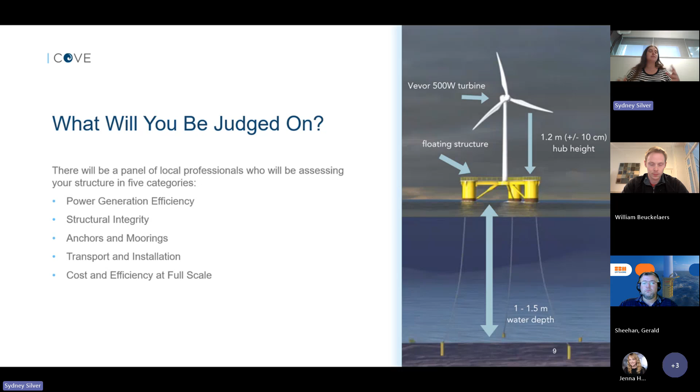You'll also be judged on transportation and installation. So how efficient are you and how long does it take for you to get your turbine from land into the water? And then finally, you will also be judged for your cost and efficiency at full scale. So how well do you use the budget that you're given, budget it out, what materials do you use compared to expenses, etc.

Here's our timeline for the local challenge. So right now, registration is open and ongoing, and that is going to close at midnight on November 30th. Next, we'll be submitting your budgets. We will basically do this as you sign up. We will reach out to you, get you to create a budget for how much money we were giving out to each team. After we've approved your budget, we will send you your money for your structure.

Then you will work together to actually build your structure, and this will be ongoing throughout the rest of the timeline. I will also be doing monthly check-ins with each team. So it'll be very quick, 15-minute check-ins once a month, just to make sure everything is going well and to check in if you need any extra advice, help, or mentors throughout the challenge.

The next and really big step for both us and the global challenge is submitting your abstracts. We want those submitted both to us and to William on January 23rd. The next is test days. There's going to be 2 different test days that we're going to have at Rely on New Tech. These are going to be on weekends in January. So these are going to be opportunities for you to take what you have on your structures already and test them in the water a month or 2 before the actual challenge takes place. And then finally, the local competition is going to happen on the weekend of February 21st to 23rd.

Perfect. And this is a very brief overview of what your abstracts are going to look like. They have to be a 1-page A4 flyer. We want them to have a sketch or a 3D drawing of your floating structure at competition scale, not full scale. We also want them to have the details of participants. So that's your photos, names, your university or college, your year of study and program. We also want you to explain some of your standout features for your concept.

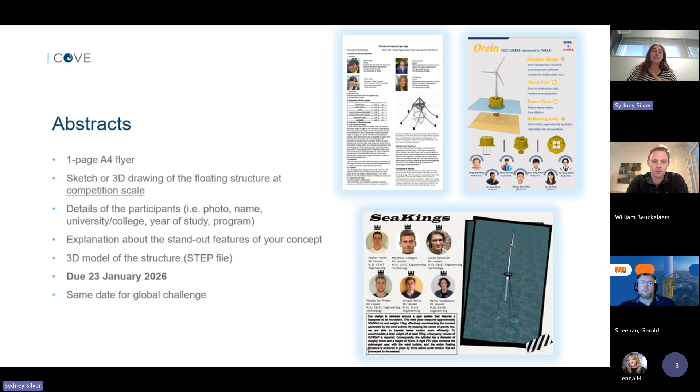We also want you to additionally send us a 3D model of your structure in a separate file, usually a STEP file. These are due on January 23rd, and this is the same date for the global challenge as well. Perfect. So I am now going to welcome William to do his talk about the global challenge and get more details about it. Thank you so much, William.

Oh, I can't hear you. Perfect. Thanks for inviting me. I tried sharing my screen. I'm not sure if it's live. Okay, great. It is.

So first of all, maybe I'll just quickly introduce myself. I'm the founder of Offshore Wind for Kids and also the Floating Wind Challenge. I've got a background in civil engineering. I've worked in the offshore wind industry for over a decade, but now I'm trying to inspire the next generation. With the Floating Wind Challenge, we really try to stimulate innovation in floating wind. And so you'll have to design and build your own floating wind support structure.

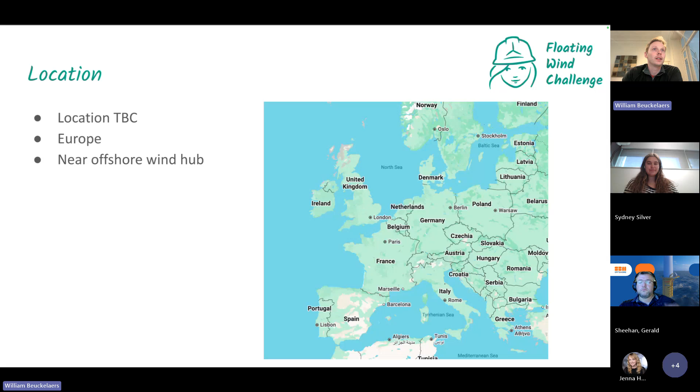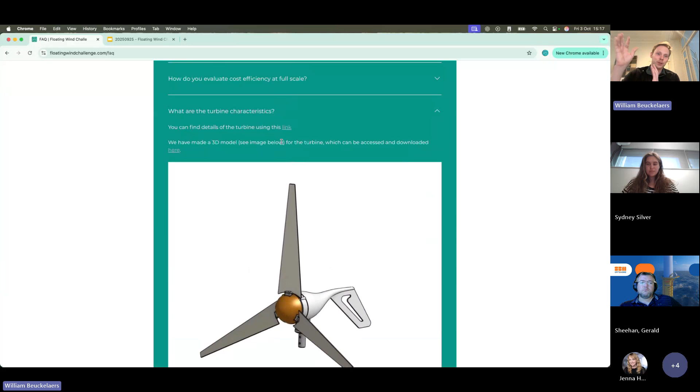So the abstract, I think Sydney already covered. Important this year compared to last year is that you'll have to provide a 3D model of your structure. And we've actually recently put the 3D model on our website, so I'll just show it really quickly. It's available in our FAQ, frequently asked questions, and if you go to the turbine characteristics, you'll see a 3D model that you can just use, and then you don't have to worry too much about that part, and you can focus more on the support structure.

So if you go to this website, you'll find the working document. We may tweak it a little bit, but at least you have something to build upon and then build your whole structure below it.

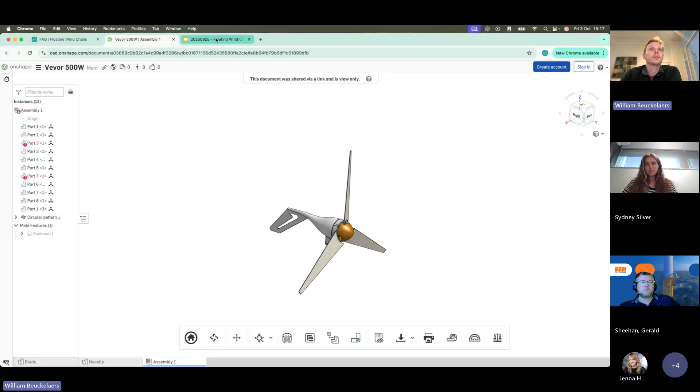Then around May, you'll have to submit the report and a video of your structure and some additional documents: risk assessment, installation and decommissioning plan, and an overview of your structure costs. We will provide a little bit more detail around this later on in the competition, because this year we want to make sure that everyone does a risk assessment following the same procedures, and also follows the same template for the installation and decommissioning plan. But this information will follow later in the competition.

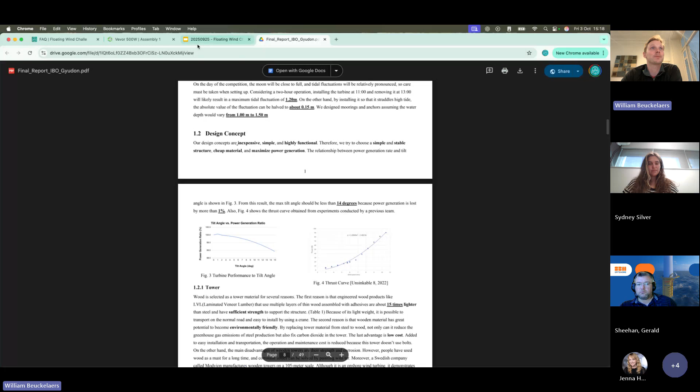And if you want to have some inspiration, we've made the top 3 reports available. If you click on one of these links, you will be taken to the reports from last year. And they can serve as really interesting inspiration to see, okay, what does a top performing report look like? What do I need to do to win the prizes? It's also available in the FAQ. Just checking where it is exactly. Here, some examples of the reports from the previous years, dating all the way back to 2023. So yeah, if you want to have some inspiration from previous teams, you can look through this.

So the criteria, first of all, structure specifications. It's a 500-watt wind turbine. The hub height is 1.2 meters above water level with some tolerance. And then water depth is minimum 1 meter and maximum 1.5 meters. The important thing here is that you have to do manual installation, so you cannot go much beyond this.

And you're being evaluated along 5 criteria, which each get 20 points: power generation, structural integrity, anchors and mooring, transport and installation, and materials and fabrication costs. But important here is that this year we will assign some bonus points within each of those criteria for innovation and sustainability. So if you have some innovative ideas that contribute to improving the structural integrity or anchors and moorings, then you will get some bonus points, or similarly for sustainability. So we try to encourage you to also think a little bit on the innovative side and on the sustainable side. But that being said, if you do something like this, it has to have a positive impact on one of those criteria. I think that makes sense.

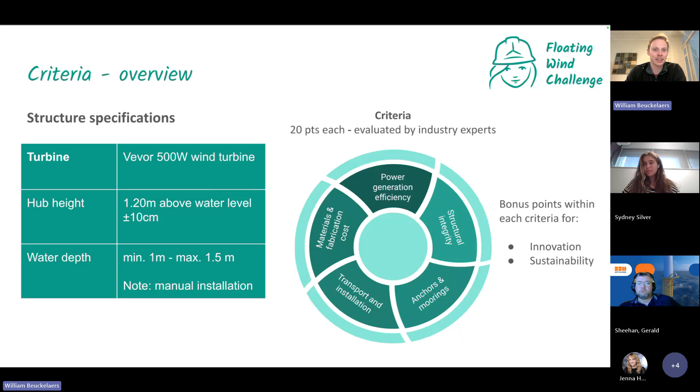So just focusing a little bit more on the reports. The first 3 items you have to evaluate at competition scale, prototype scale. But items 4 and 5, we ask you to also evaluate at full scale in the report, just because we have to make sure that the concepts translate to full scale offshore wind turbines. And there are some reference documents that you can use for the full scale models. For the structure, we have a detailed table of how we evaluate the points. For example, for transport and installation, if you have a fast installation sequence within tolerances, it'll get a score between 14 and 17. And like this, we add all of the points together and then decide the winner.

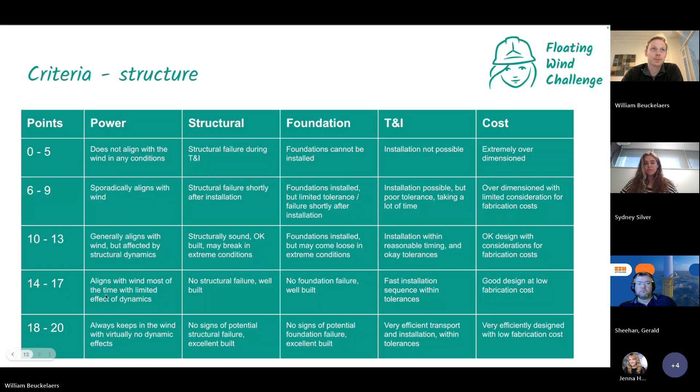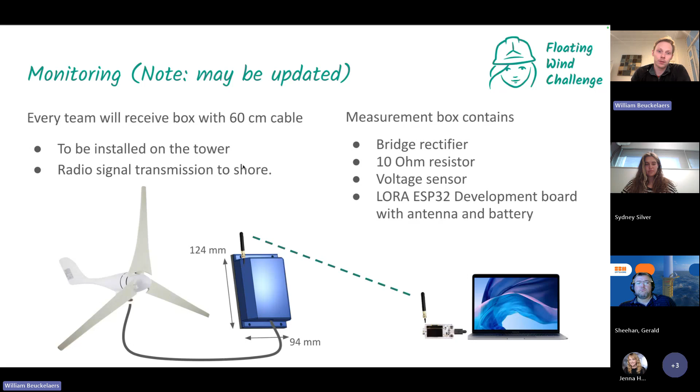We also do a little bit of monitoring of your structures. You don't have to worry about it too much for the abstract, but later on you'll have to see how exactly you do the wiring from the wind turbine to our monitoring box. There are 3 AC cables that are sticking out of the wind turbine, and we'll have to attach a monitoring box to your tower. And then we have a radio signal that sends data to the central computer, and we will be able to compare the performance of all the wind turbines at the same time. So this is the setup from last year. We may update it slightly for this year, but this is the general setup that we use.

And then ultimately you compete for one of 2 prizes: 1,000 euros for the best report or 1,000 for the best structure. And we also assign some smaller prizes.

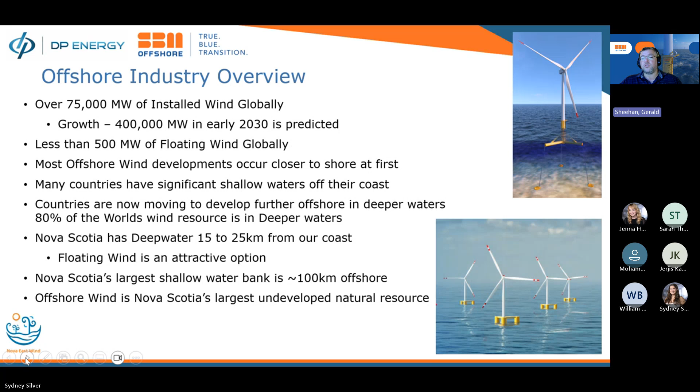And we see from other countries, now that some of them have developed their close to shore fixed wind, now they're moving into their deeper waters. And the trend is, basically 80% of the world's wind resource is actually in those deeper waters further away from shore. So this is why floating wind is really a significant growth area. And just echoing what Sydney said, offshore wind is one of Nova Scotia's largest undeveloped natural resources. So we do have a significant resource, and we're going to show you a map here in a second.

And this is why we see some of our politicians being so positive about the energy and the industry as well. So it's responsible. It's not carbon intensive. It's green energy, and the potential is real. Next slide, Sydney.

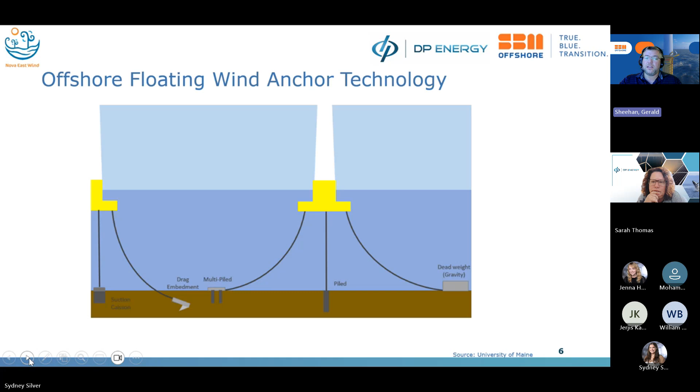And the last one, which is the most simple, which is a lot of times what we do see in some of the technologies or some of the competitions, is a dead weight anchor. So basically, if you could picture a brick or something, but from an offshore wind perspective, these are normally very, very big steel structures. And what you'll see from a competition perspective is that a lot of folks would use steel or concrete or other types of anchors that just sit on the bottom, or in the case of testing in the pool, sit on the bottom of the pool.

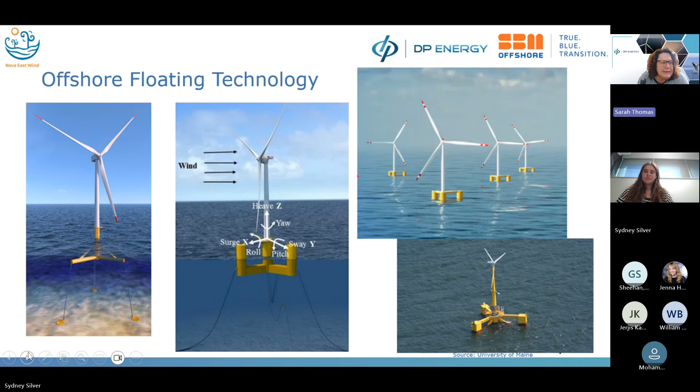So some things to keep in mind as you're working on your design and thinking things through. Don't forget where you have to scale up, and that's where you're thinking about installation and your costs at scale. For anything in the water, you need to remember what stability is. So center of gravity and center of buoyancy matter here. And that free body diagram, you've got 6 degrees of freedom, okay? Make sure you know what you're designing for, which is the turbine.

So William gave the specifics, but you'll have the spec of your turbine. You need to know the weight and your center of gravity of your turbine. And that all factors into the design that you're working on. When you are working on anything this big, weight is king. Weight is so critical when you're trying to work on anything. So just keep that in mind. And you need to know what sort of wave motion you're designing for as well, because that factors into any sort of reserve buoyancy that you need to factor in.

Ultimately, you're trying to balance strength, stability, and cost overall. That's your ultimate challenge, and I've no doubt you guys can do that. Okay. And the last thing I'm going to highlight on the slide here: offshore wind turbines have a cable attached. There is dynamic loading associated with a cable like that, so keep that in mind. Okay. Next slide.

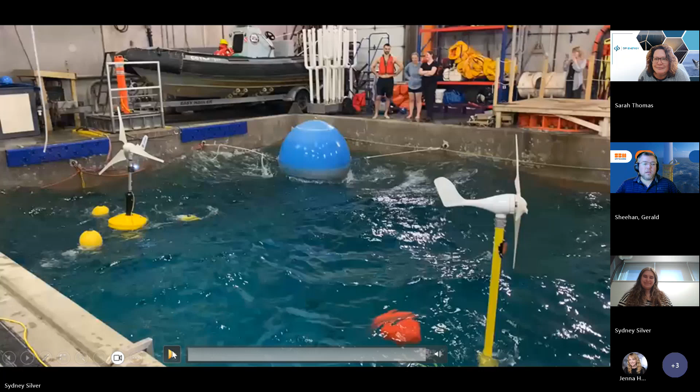Jerry? Yeah, so hopefully the video will play, but maybe Sydney, just give me 1 second before you hit play. The last couple of years, I've been fortunate enough to be a judge with Sydney and the team at COVE and some other industry professionals as well. And what I wanted to do today is show you one of the videos from last year, so you can see the different types of structures.

The first one on the left, closest to the wall, was kind of a mixture between a tension leg platform and a semi-submersible with additional buoyancy. The turbine that's closest to the left-hand part of your screen right now is the TLP, the tension leg platform. And the one you can't see on the screen yet, but you'll see it in a second, the one on the far right-hand side, that's a semi-submersible.

What's happening is the wave ball is creating waves in the pool, and you're going to see how the turbines and the structures really respond in the pool. I think it'll be good to learn from the previous years, move forward with the designs and the ideas, and hopefully this will give you an opportunity to see how things work and really demystify what happens in that wave pool. So Sydney, maybe hit play and we'll show everyone what happened last year. On my screen it's a little bit choppy, but hopefully it'll come around.

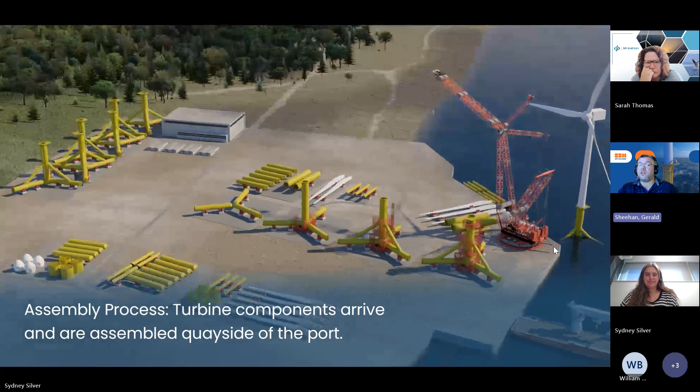This was just a visualization that we shared of how turbines would be manufactured on shore, kind of almost in an assembly line type process.

Oh, that jumped. It might have jumped to the next. Yeah, that jumped to the next video, Sydney.

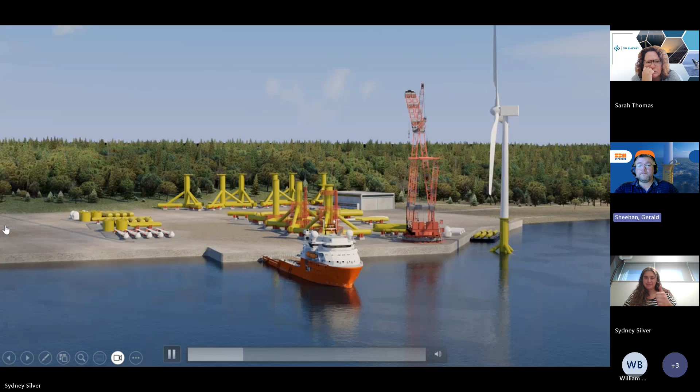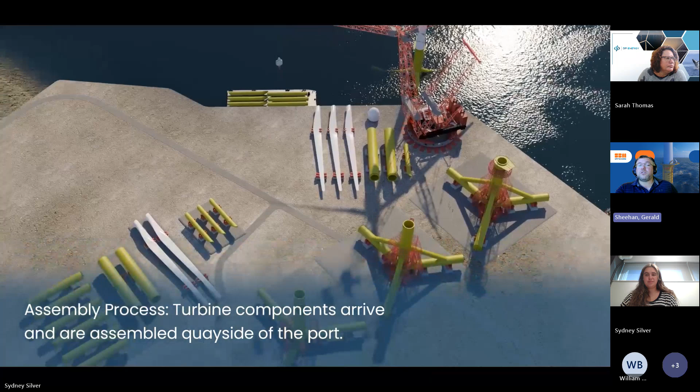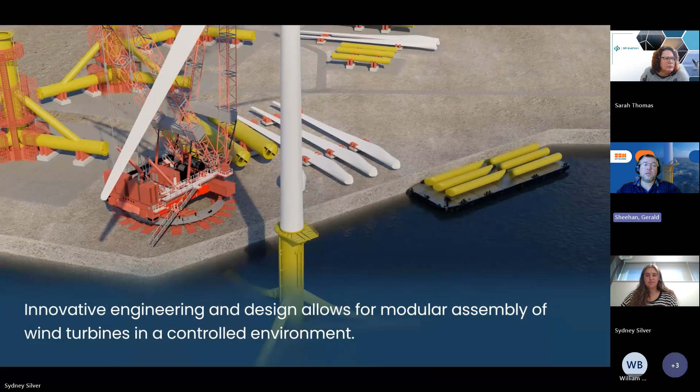All right. So here we're showing how a large crane would be used to help build the structures, and then a large ring crane will be used to actually install the turbine on top of the structures once they're floating. This just shows what some of the structures would look like being stored and how some of the components would be stored. Integration of the turbine at shore.

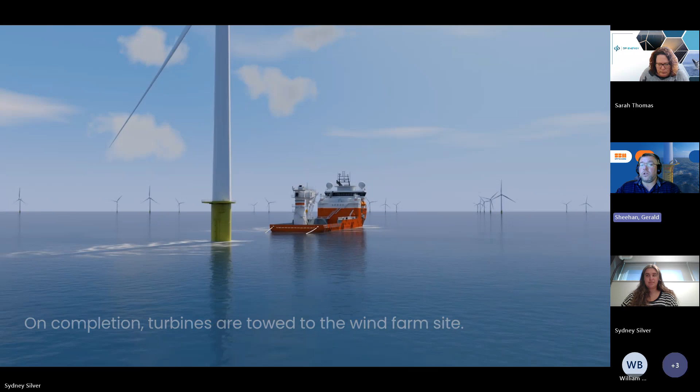So a lot of the work with floating wind actually happens at shore, the same as it'll happen with your teams. And then you put it together, and then you put it in the ocean and tow it to its final site. So the process that you'll follow as participants really does follow how companies do it in practice.

And the next one shows really the underwater view. So again, we like showing this structure. This is SBM's TLP. It shows how it's anchored. It shows how a crew transfer vessel would actually bring people to site, how the crews would climb up the ladder to access the maintenance platform. And again, this is real. Like this is our actual design, and we had a Nova Scotia company make this wonderful animation and visualization so we could share it with the community.

And I think what you'll see in a few seconds, if it continues to play, is that then we get kind of a drone image. This just shows how the power cables would come down the side of the structure and how they would go to the bottom of the ocean. So in a few seconds, we'll see kind of the drone view.

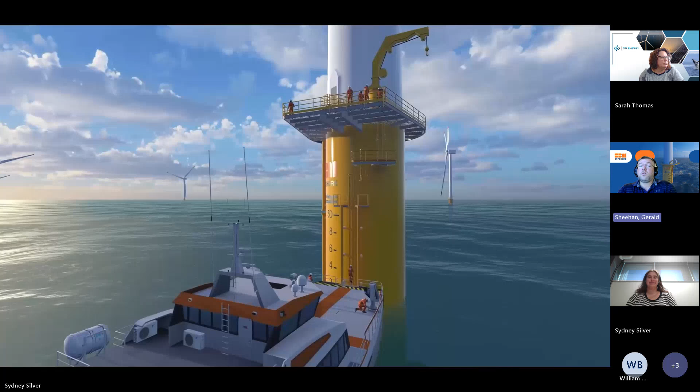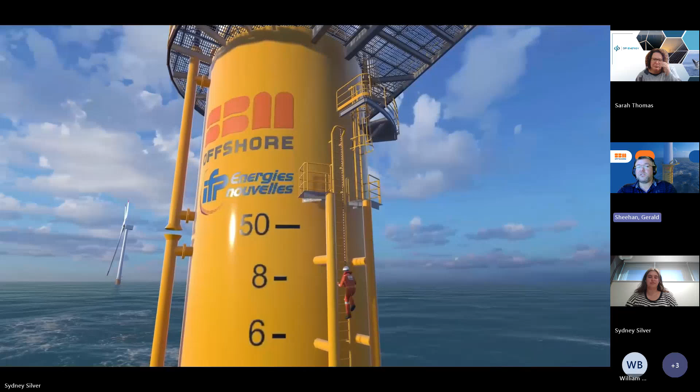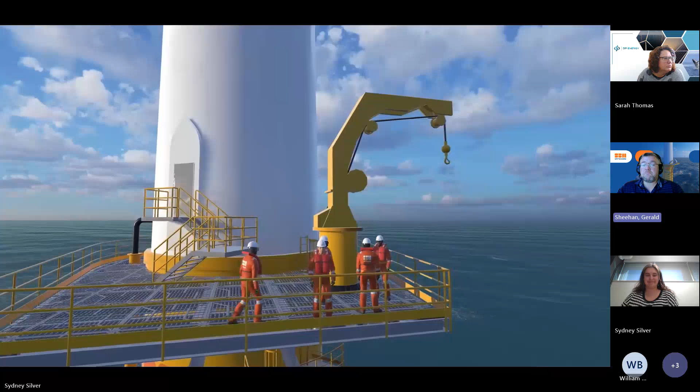And this shows really what an offshore wind farm installation would kind of look like. These turbines, from a visual, they look like they're kind of close, but really that's about 2 kilometers distance between the turbines. So it's a fairly significant distance. And again, this just shows how people would actually walk to work, basically. How they would get there, how they'd be able to access the facility to do their maintenance and other inspection activities.

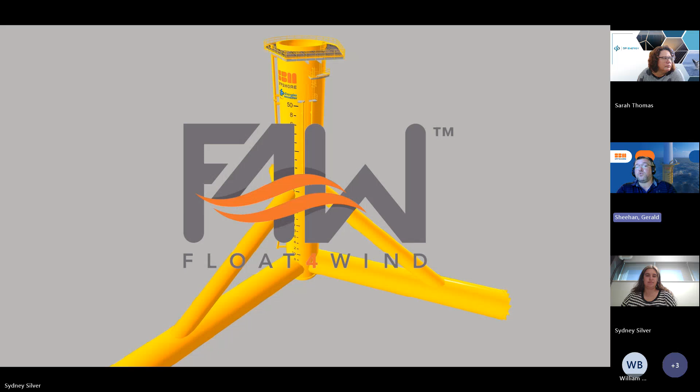We'll kind of get the bird's eye view here in a second to really show you what a field could look like offshore Nova Scotia. And again, you're not seeing land, and in Nova Scotia, all the parcels that the government recently announced are all no closer than 20 kilometers to shore. And those, basically, you won't see them from shore. And if you did, they would be the size of maybe an ant on the horizon. So it'll be very, very small. I think that's it for slides.